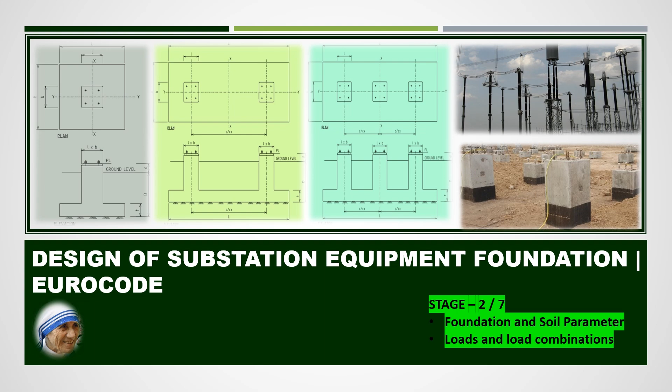These are the various design stages we need for the design of substation equipment foundation in Eurocode.

First one is an overview of calculation, which we have already seen in the first stage of video. The second one is foundation and soil parameter, loads and load combinations, which we are going to discuss in this second stage. Third one is a stability check. Fourth one is foundation bolt design.

Fifth one is a design of bottom slab. Sixth is punching and one-way shear for bottom slab. Finally, the design of pedestal.

So with this, let me move on to our Excel calculation.

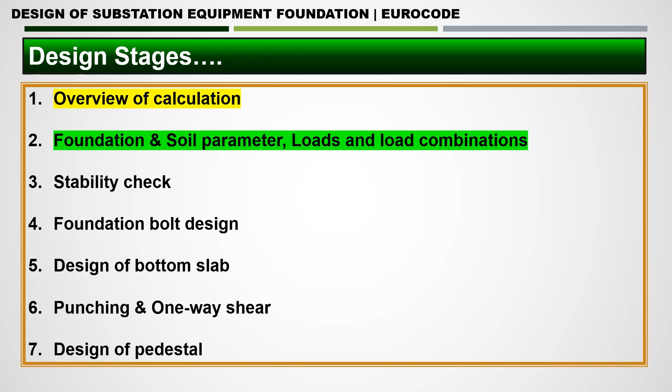In the screen you can see the Excel calculations. Here in the plan view picture you can see that capital L and capital B are the bottom slab size, and small l and small b are the pedestal size in plan.

Coming to the elevation, you can see that small t is the thickness of the bottom slab, capital D is the foundation depth, that is from ground level to the bottom of the foundation, and small d is the height of the pedestal above ground level to the plinth level.

Based upon this picture, we have assumed this foundation size as the pedestal is one number for single isolated footing, and the sizes we have assumed as 0.7 by 0.7 meter.

Bottom pad slab we can assume as 1.6 by 1.6, so this text should match the picture. The depth of foundation, capital D, is 1.5, bottom pad thickness T equal to 0.3 meter, plinth level is 0.3 meter we have assumed.

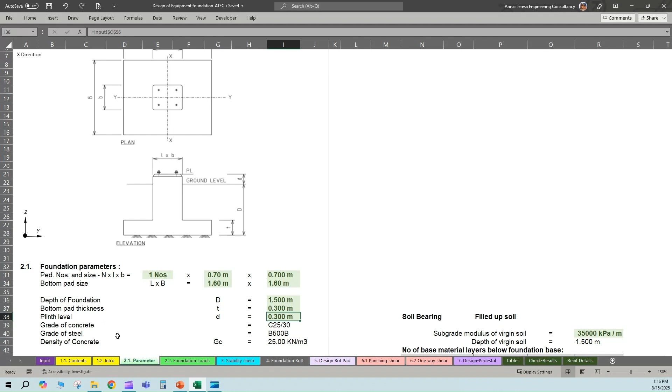Grade of concrete and grade of steel, which we already considered during our introduction part on materials, so that we can consider here.

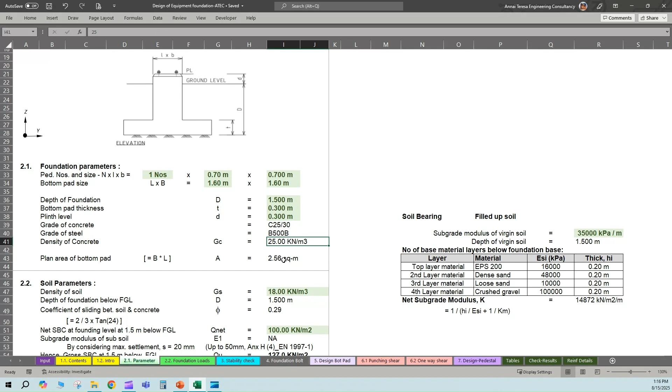Density of concrete we all know is 25 kilonewton per meter cube, and the plan area of the bottom slab is just L multiplied into B.

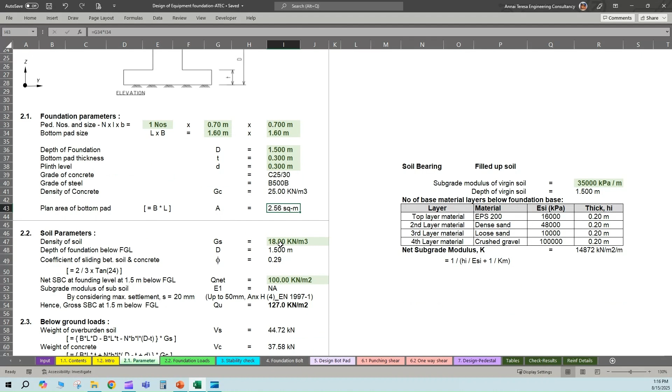Dry density of soil we have considered as 18 kilonewton per meter cube. These are the assumptions, and foundation depth already we have considered as 1.5 meter, and internal friction angle is 24 degree.

The coefficient of sliding between soil and concrete we have considered as 2/3 of tan phi, that is tan 24. The coefficient of sliding is coming to 0.29. We have assumed 24 degree as the angle of internal friction.

So net safe bearing capacity at foundation level, which we can get from the soil report, we are assuming here as 100 kilonewton per meter square.

Sometimes the geotechnical report will not provide the direct soil bearing capacity. Instead they will provide the subgrade modulus. In that case, what we need to do, let me explain.

If they have provided directly the soil bearing capacity, then this line is not applicable, so it is showing not applicable.

In case they have provided only the subgrade modulus in the soil report, don't worry. I will explain how to derive this subgrade modulus into bearing pressure of the soil.

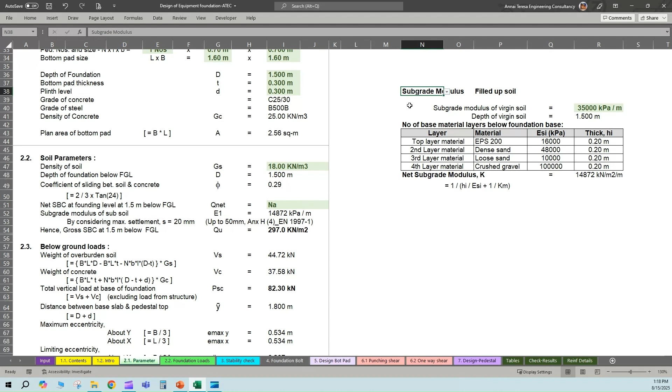This subgrade modulus is given in the geotechnical report, so select this. Coming to the soil below the foundations, sometimes it won't be virgin soil.

There may be some filled up soil also, so what we can do is assume it as filled up soil with 4 layers.

In most of the European countries, they used to lay the foundation over filled up soil or filled up layers which are more compacted and stronger than the virgin soil. That's why they go for developed or compact layers of soil below the foundations.

So what I'm going to consider here is the top layer, the first layer. We are going to consider EPS 200. Generally this EPS 200 is used to resist the frost impact. Most of the Europeans used to have that ice impact on the ground, so this will cause frost freezing and thawing, which means the foundation used to float below the foundation level.

So in order to resist that, they used to place various materials below that. This is one form of material, EPS 200. According to the thickness and the requirement of the ice freezing effect, they used to decide this thickness. Not only EPS, but also XPS, which is an extra layer to provide the freezing resistance, is also used.

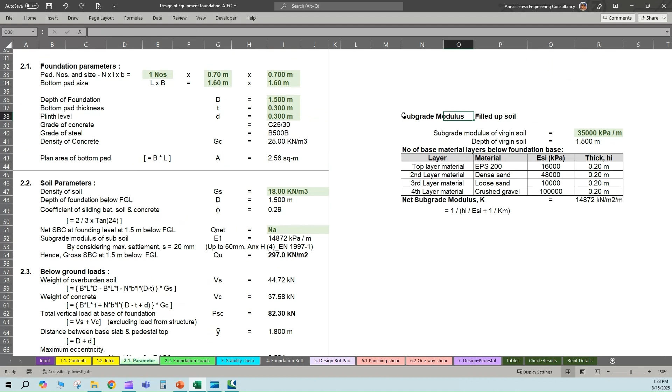So at present we can consider the soil bearing capacity, which is 100 kilonewton per meter square, and this net SBC we have assumed is to be added with the density into depth of foundation in order to make a gross SBC. We are adding this 100 to 27, the product of density of soil and the foundation depth, so we are getting 127 kilonewton per meter square. This is the gross SBC at 1.5 meter depth.

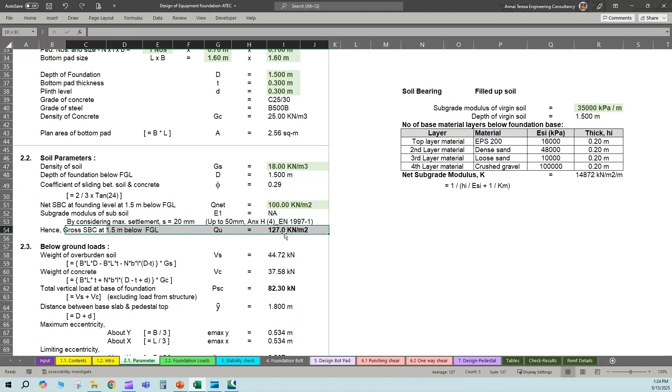Now coming to the below ground loads, here we are going to calculate the overburden soil. So how we calculate the total volume of excavation: we add the length and width of the base slab into the total depth of the foundation from the ground level to the bottom of the foundation, then we deduct the slab volume and the column volume.

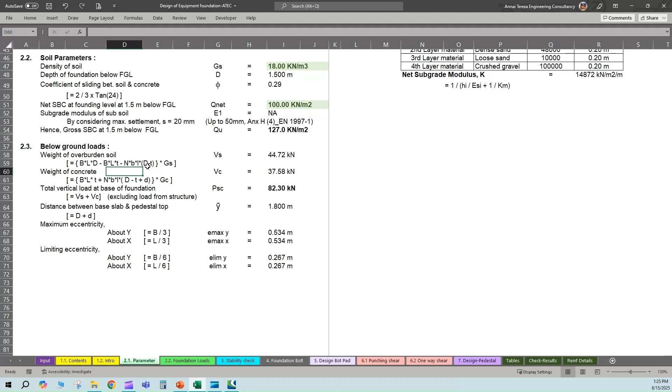So n is the number of pedestals, we have assumed 1, and small b by small l is the size of the pedestal. D you can see in the picture, D is the depth below the ground level minus the thickness of the slab.

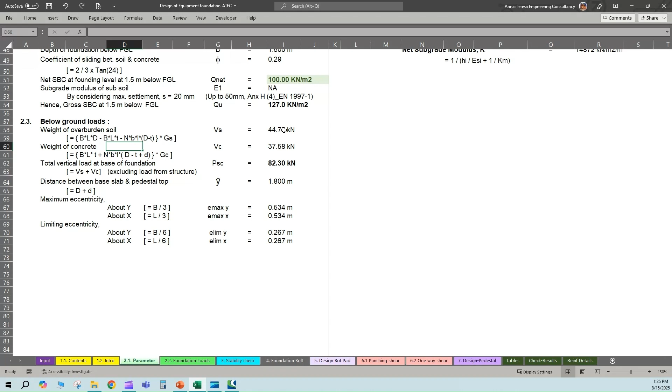So on looking at this picture and the equations, you can find out the volume of the soil, and this volume of soil needs to be multiplied with the density of the soil. The density of soil, which we already assume, is 18 kilonewton per meter cube. So multiplying that, we are getting 44.72.

And weight of concrete we can calculate as B into L into T. So BL is the size of the base slab multiplied with the thickness, plus N times small bl, where number of pedestals is 1, small bl is the size, and D minus T will provide the clear height of the pedestal below ground level. Adding this to the above-ground pedestal height, we get the volume. This volume is multiplied with the density of concrete, 25 kilonewton, giving 37.58. Adding this to 82.3 — this is excluding the structure weight; structure loads are not included here.

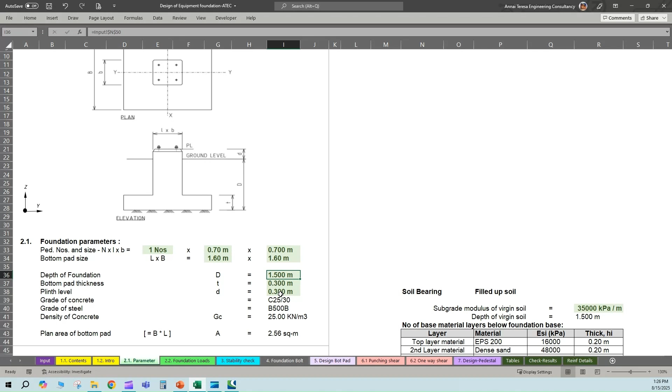And this distance we need to calculate. This is the total clear distance of the total foundation, from top of pedestal and top of ground level up to the plinth level to the bottom of the foundation. So for that we are adding small d and capital D.

This is required to find out the maximum bending moment at the base of the soil due to the horizontal force. We will look at the stability check in the next version. These two parameters we already discussed in our introduction part — they are very essential to find out the bearing capacity restrictions.

For limiting eccentricity, if the actual eccentricity due to the moment is more than the limiting eccentricity, there is no issue — that is B by 6 or L by 6. There is no issue; we can make some modification in the bearing pressure calculations accordingly, in order to find out the point of loss of contact of the foundation. But in no case should it exceed the maximum eccentricity, that is B by 3 or L by 3. In that case, we need to directly increase the foundation size.

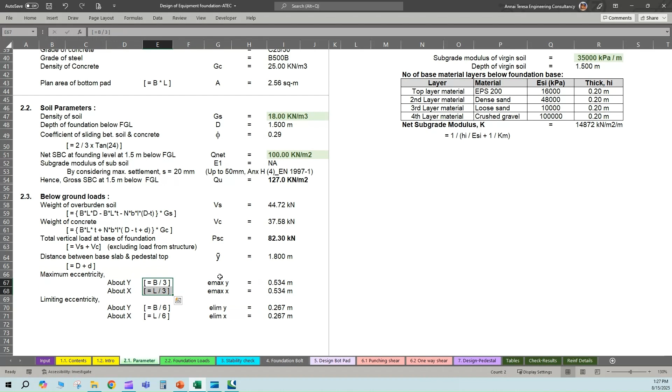So these are all the parameters to be considered while doing the design of foundations. Next we will move on to the foundation loads. These are all the foundation reactions.

First, table 1.1 is listed for primary loads, which are dead load, live load, conductor tensions, wind load along X, wind load along Y direction, ice loads, and finally the short circuit forces. These are the loads we need to consider as primary, and the reference document should be the structural design document, where we can find the foundation forces for this.

All the values highlighted in green cells are the input values to be entered here. So for dead load we have considered 9.5, which is the vertical load from the structure due to the self weight of the structure, equipment, and conductor, or any other fixing part.

We need to consider this 9.5 kilonewton we have assumed here, and the live load is 1 kilonewton we have assumed for the workmanship — the person who is going to do maintenance or installation. We have assumed he will climb on the structure to install, so for that 100 kg, that is 1 kN, we have considered as per EN 50341, the standard mentioned for substation or overhead line transmission tower.

Those also we need to arrive from the structure calculations. Accordingly, the moment is 6.5 in My direction. Coming to the wind load, here we have assumed 3 kN, accordingly the moment My is 8.5. Likewise, wind Y is 2.5, and 8.5 in Mx moment X.

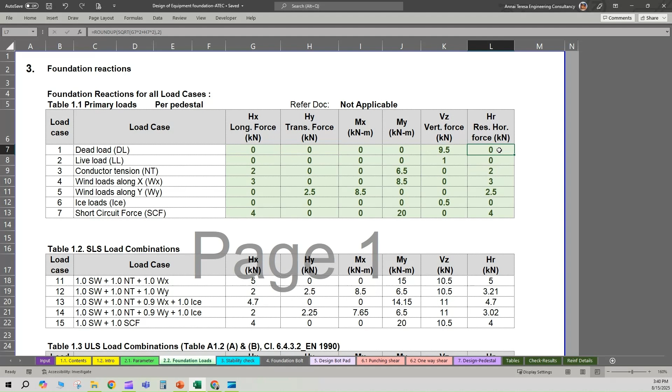Ice load is 0.5 vertical alone, and short circuit force we have considered as 4. Accordingly, the moment My is 20. This is the resultant force, which is the square root of Hy squared plus Hx squared. Next, table 1.2 is the SLS load combinations, which is simply addition and multiplication with the factors.

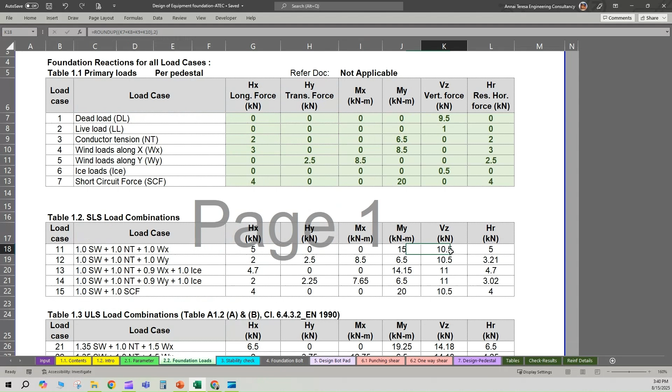These are the load cases which we discussed during our introduction, listed as per the load cases. As per this, we need to arrive at these formulations so that all applicable loads are combined together in Hx and Hy, Mx, My, Vz (vertical), and resultant horizontal forces.

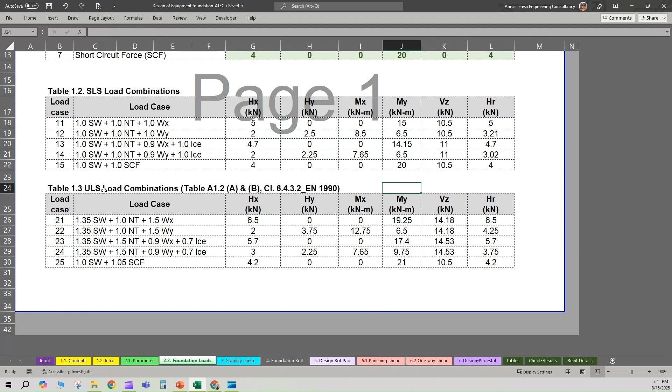Next is table 1.3 for ULS load cases. These load combinations are as per clause 6.4.3.2 of EN 1990. Accordingly, this formulation is done for Hx, Hy, and Mx, My.

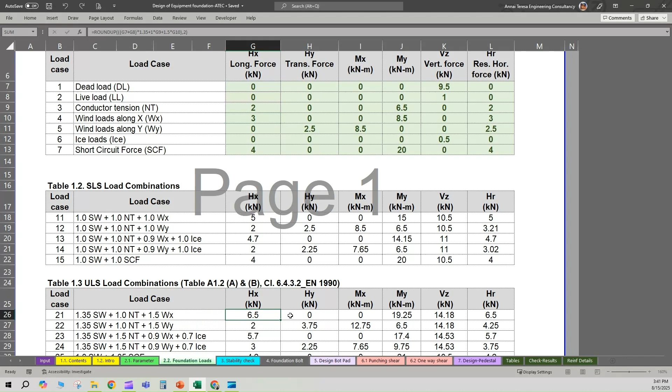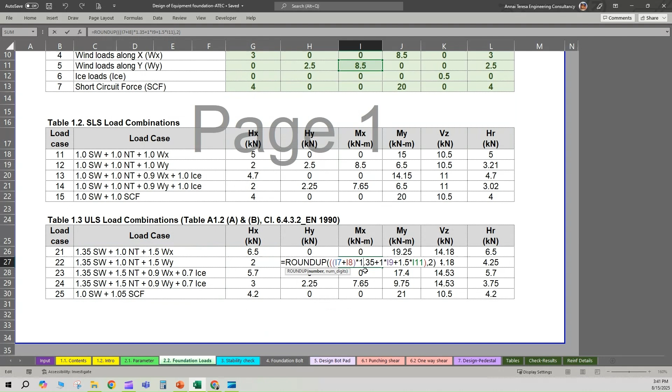The same factors like dead load, it is 1.35. Here the dead load cases include both live load and dead load, multiplied with 1.35, and the normal tension factor is 1, applied to conductor tensions. So 1.5 times the wind. These are the primary load combinations for ULS cases we have considered here — simply summation and multiplication with the partial factors, nothing other than that.

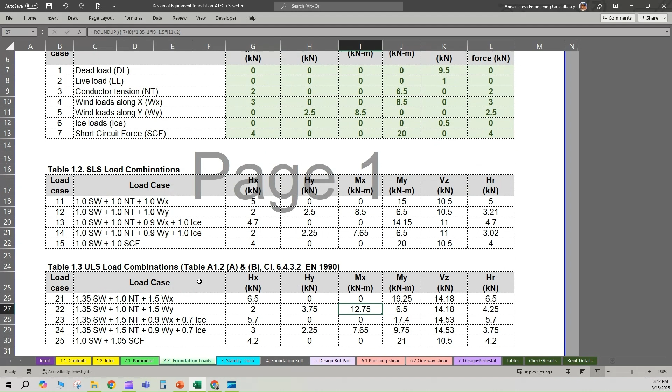So with this we can close this second section, and we can look into more detail about the stability in section 3. Thank you. Look in the description for more related videos.